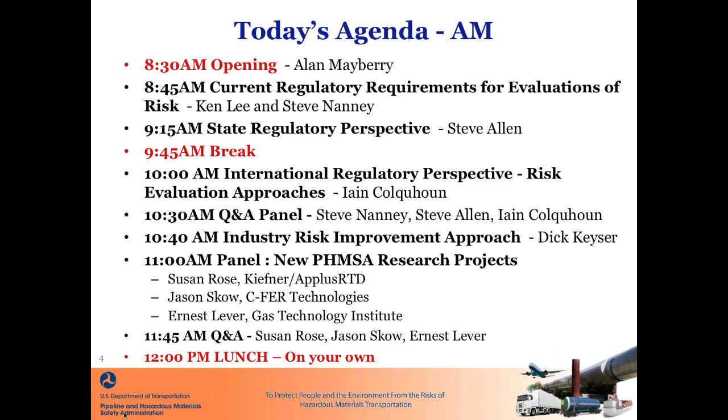Iain Colquhoun is joining us from the National Energy Board of Canada to provide a perspective from Canada. I understand Ian's probably just getting to DC right now, so we're cutting it close with him coming in on the agenda there. Hopefully he'll be here by 10. If not, we may need to scoot a couple of people around.

Then we'll have our first panel that talks about some research projects that PHMSA has undertaken, some recently awarded research projects, that will give you a summary of what's going on and what we're doing related to risk management in our R&D program, and some funding that we've done related to that.

Then shortly after lunch, we're lucky enough to have snagged the Honorable Chris Hart, the chairman of the National Transportation Safety Board, who will come and provide remarks after lunch. And then we'll get into some perspectives outside the pipeline industry after lunch, and then some other panels related to risk modeling later in the afternoon as well.

And that'll wrap up day one at about 4:15, 4:30 or so. I'll come back on to just wrap up, and we'll tee up the next day, which will kick off again at 8:30. We'll have another panel with 3 speakers, and we'll also have a perspective from Sara Gosman from University of Arkansas School of Law. She's also representing the Pipeline Safety Trust in providing that public perspective, and she happens to be working on a paper she'll be discussing related to risk management tomorrow.

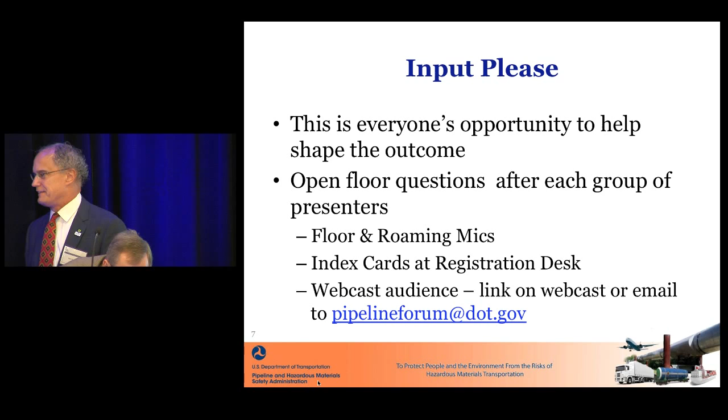Good morning, everyone. I want to thank everyone for attending here and also all the many people on the webcast. My name is Ken Lee, I'm Director of Engineering and Research at PHMSA. As Alan said, this event really follows up an event that we had in July of 2011.

That event, PHMSA and NAPSR held a public workshop on improving pipeline risk assessments and record keeping. That event focused on gaps in data and poor quality data, and that lack of data does not mean there are no risks. It focused on understanding interactive threats and the need to address this significant challenge. It also talked about how threats are not static, they're dynamic and changing with time, so you constantly need to change and adapt your models to take that into account.

Recent pipeline incidents and the National Transportation Safety Board really highlighted the need for continued diligence and improvements in risk analysis.

Our previous workshop highlighted the opportunities we had to improve the overall approach to risk analysis. PHMSA has been quite active in pipeline safety management systems, which risk analysis is a part of. This workshop will focus on risk modeling, mainly that subset of risk analysis, which is also a subset of risk management. So we're just going to focus mainly on the models today and tomorrow.

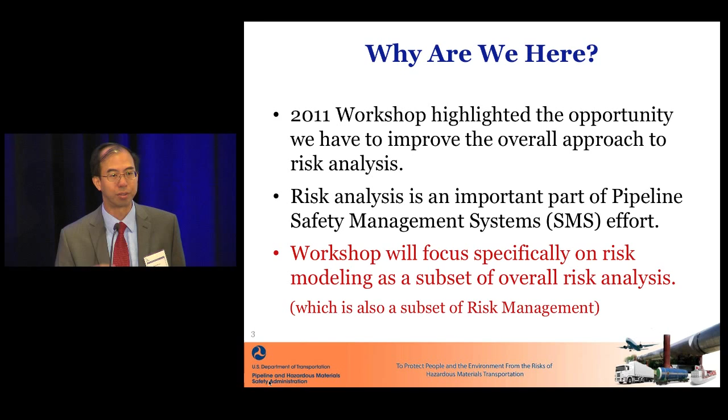This highlights the different issues that we need to address here. And like I said, Steve Nanney will continue the rest of the presentation, starting off with the National Transportation Safety Board recommendations.

Good morning. Let me ask one thing before we get started - how many people are more awake in this room than I am right now? I normally get up at 7 a.m. every morning, and that's Houston time. So I'm just now having breakfast if I was in Houston. So anyway, if I miss a beat or two going through this, just say, well, he's sleepwalking through the presentation.

One thing before we go - I always like to start with the last slide first, though I'm not going to have it up. What are the workshop goals? Why are we here today? Well, for me, it's to learn what risk models are. I'm probably the dumbest one in the room, or definitely not the smartest on risk models. So I'm here to learn. I'm here to listen to folks outside the pipeline industry, what they're doing

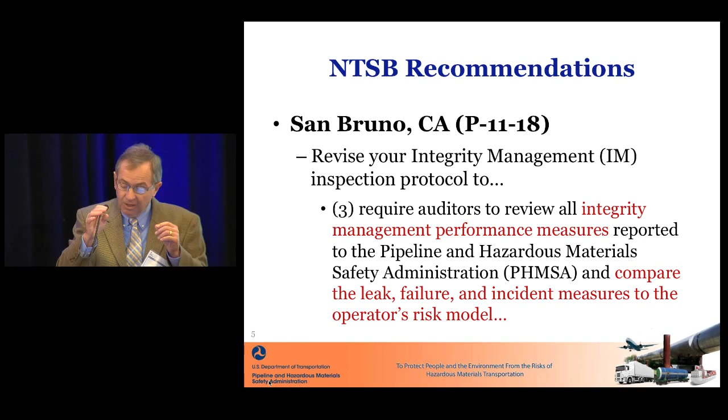Some of the things that the industry and PHMSA has gotten from the NTSB based upon San Bruno is, as you can see here on this slide, is to improve our integrity management performance measures. In other words, to compare the leak, failure, and incident measures to your operator's risk model.

How are you putting that in your risk model? That's one thing we've gotten from NTSB, from San Bruno, and others. When you see P-1509, the 15 stands for 2015. So this is a new recommendation that PHMSA and the industry have gotten from NTSB.

If you go on the internet and Google NTSB P-15-9, it should pop up. Anyway, it's to establish minimum criteria for eliminating threats and provide guidance to gas transmission pipeline operators for documenting their rationale for all eliminated threats.

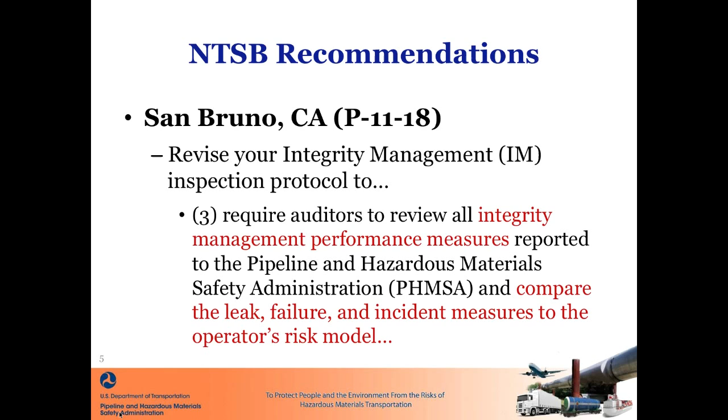Sometimes on a pipeline system, if it's an older system, it's hard to eliminate all the threats. We've got to realize that eliminating them is ongoing. It may be eliminated today, but due to how you're operating the pipeline, 2 years, 5 years, 10 years from now, it may pop up again as a threat.

Another NTSB recommendation is P-1510: update the guidance for the pipeline industry for the evaluation of interactive threats. The guidance should list all threat interactions that must be evaluated and acceptable methods to be used for those.

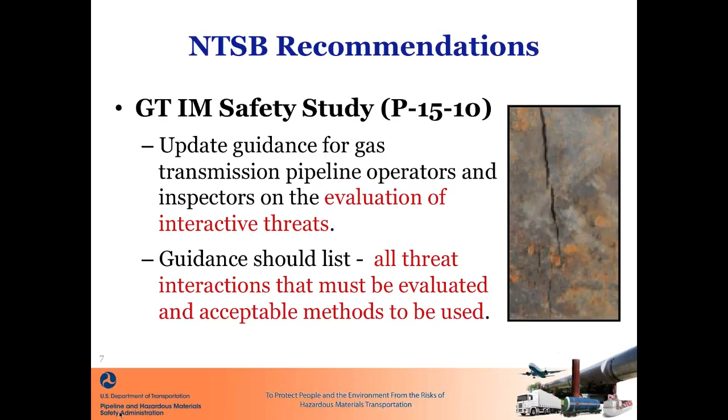An example would be if you've got disbonded coating, corrosion, and you're seeing cracking on your pipeline, what do you do for these type interactive threats? How often do you look for them? Are you doing a one and done on your pipeline, or do you have a robust methodology to go back and relook at it?

The next item is P-1511: develop and implement specific risk assessment training for inspectors. This is PHMSA - you need to better train your inspectors to look for risk and how it's treated by operators.

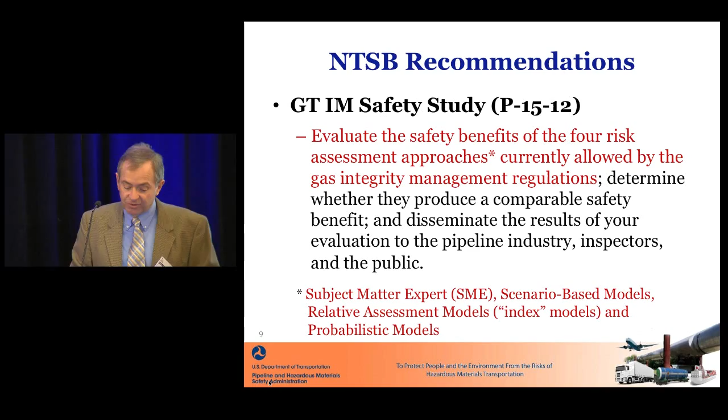The next one is P-15-12: evaluate the safety benefits of the four risk assessment approaches. At the bottom of the slide you'll see the approaches are the subject matter expert, or SME, the scenario-based models, the relative assessment models - I always call them the index models - and the probabilistic models, which I don't quite understand fully, and I know most of us probably don't have enough information to adequately implement them. I think that's one of the goals here today - we want to learn more about those types of models.

And then last is, how do we use these results? How do we evaluate them for safety, to keep our pipeline system safe?

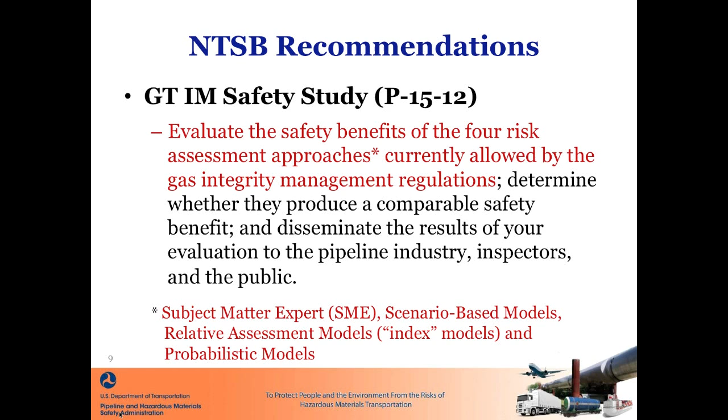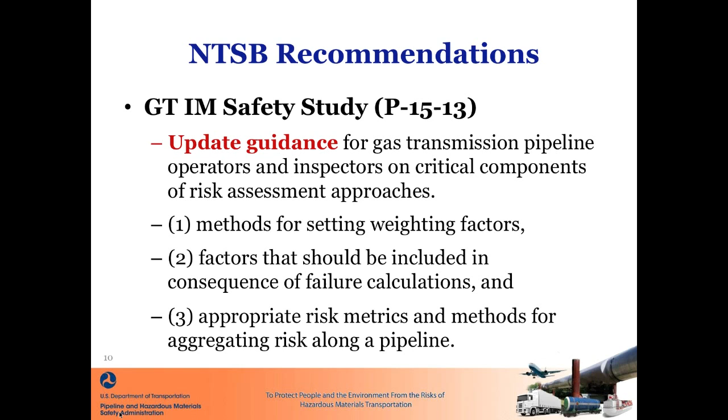From that, what does the code presently say? If it's gas transmission integrity management, it'll be under Part 192, Subpart O. If it's gas distribution, it'll be Subpart P under Part 192. And if it's hazardous liquids pipeline, the IMP program is in 195-452.

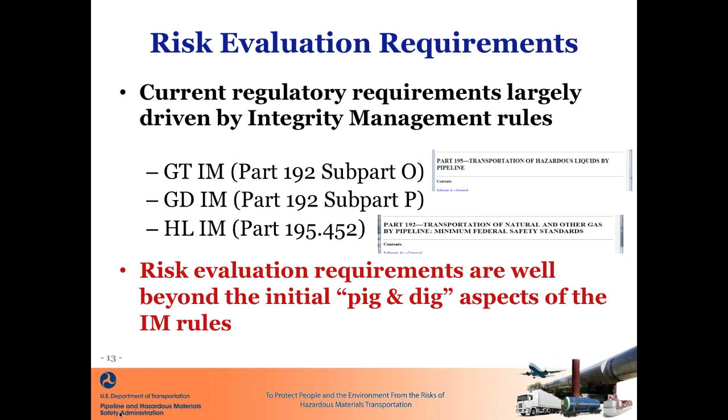All of these programs have metrics in there and requirements for doing risk modeling and risk evaluations. From a PHMSA standpoint, the industry is well beyond the pig-and-dig aspects of the IMP rules. What we're trying to do here today is get better models in place, and get guidance out for everyone to do a better job.

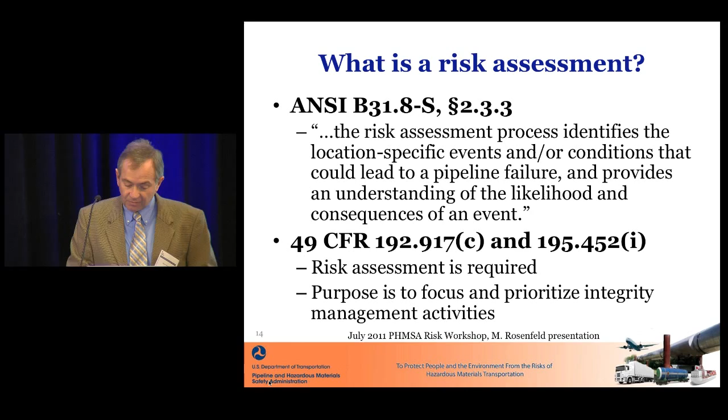Integrity management - what does PHMSA see as being a part of it? Of course, threat identification. One of the things that highlights San Bruno, which we seem to talk about at every seminar or workshop, is that the pipe was categorized as being seamless, 30-inch seamless pipe. We've got to make sure whatever we do, we characterize it right. We identify the threat correctly. If we say we've got seamless pipe when we've got low frequency ERW or some type of submerged arc welded, or whatever type of welded pipe we've got, we may be missing the boat. And that gets down to data gathering and integration of that information.

We have been having workshops on the integrity verification process as far as getting data for your pipelines, doing a better job of that. And then the risk analysis - that's the pinpoint here today - is when should we have assessment intervals? Should they be 2 years, 5 years, 7 years, 10 years? And how do we come up with the assessment intervals? Are we doing fatigue models? Are we not doing fatigue models?

Are we looking at the pressure profile of the pipeline, or the operational pressure profile? What preventative and mitigative measures are we putting into place? What are those measures? Are they appropriate for the type of risk that we have on the pipeline? And then, are we monitoring the defects or the anomalies in the pipeline? And again, that decision-making has to be an ongoing process.

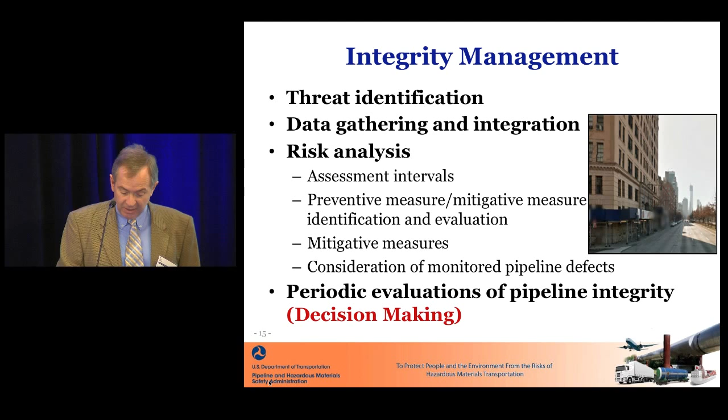The risk evaluation requirements for a successful integrity management program - it should be investigative, data-driven, analytical. Definitely look at interacting threats. We think in most models that's a weakness that operators have, is how they look at interacting threats. I know for some of them, it's very hard when you've got one, two, three, maybe even four things acting together to cause the problem. What is your integrity decision-making? And then what are you doing for the prevention and mitigation of those?

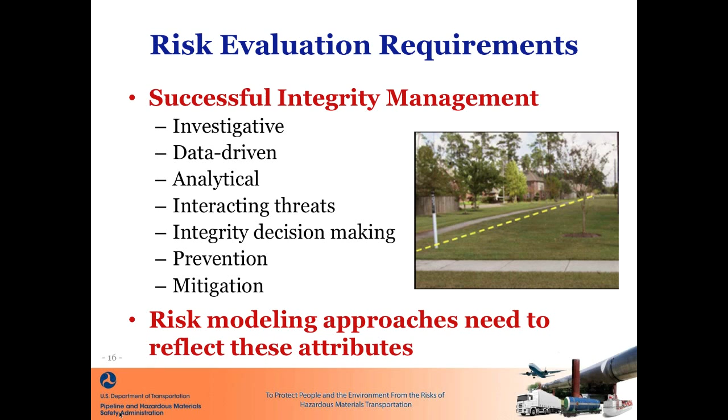The risk evaluation requirements - the risk evaluation approaches need to be investigative-oriented. For me, what that means is you've got to get out on the pipeline. In a lot of cases, you've got to dig it up to see what's wrong, or you've got to run a pig through and properly evaluate those results. You've got to make sure that your ILI vendor is giving you all of those results, that you're properly giving them requirements, that you get them, that some of them are not hidden. Not that you would know they were hidden, but make sure you skin the onion to make sure you're getting all of those.

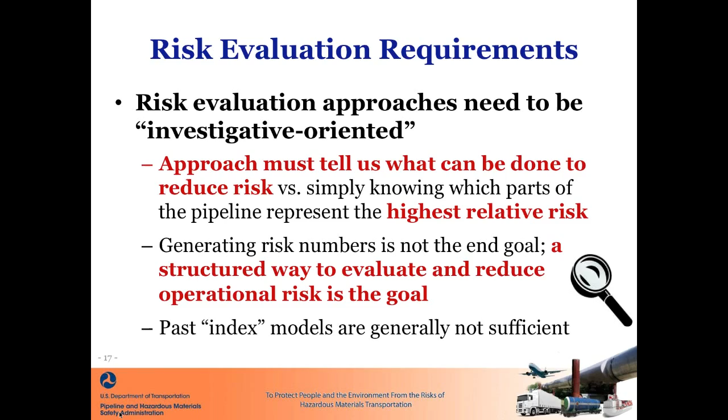In other words, the approach must tell us what can be done to reduce risk, versus what is the highest relative risk on our pipeline. And in generating the risk numbers, that's not the end goal, but we should have a structured way to evaluate and reduce the operational risk. That is the goal. From PHMSA's standpoint, past index models are not sufficient. We've got to look at what we do on these interactive threats. Do we use two separate models to look at threats? It may be that one model is not the end all.

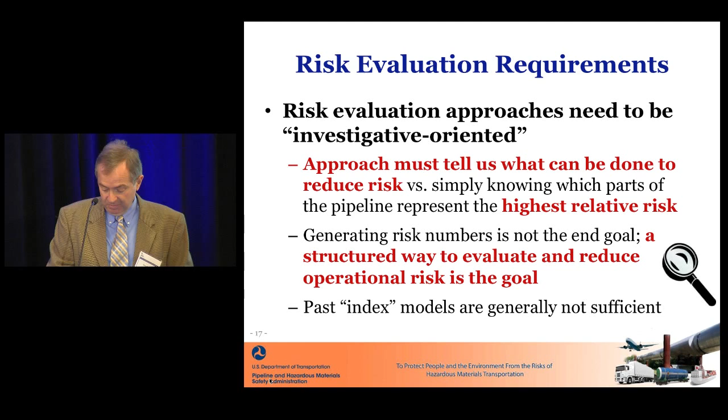As far as data, as you can see, the head of this slide is data, data, data. If you don't have the data, it's hard to do the risk model. Again, missing and inaccurate data results in an unreliable risk evaluation conclusion. In other words, garbage in, garbage out if you don't have good information. That's why PHMSA is pushing the integrity verification process for both gas and liquid pipelines, because we see that there are still gaps in the basic data.

A question about missing data: think back, you've been doing integrity management for 10 or 12 years, depending on gas or liquid. On pipelines where you have data gaps, have you been doing destructive testing on the pipe, on the seam, the pipe body, looking at the coating where you lack information, so you gather that data? Are you checking for cracking in the pipe? Are you doing all these things, not just running pigs, but when you dig up the pipeline, are you looking at everything? And then keeping the data up to date, I know that's a big challenge.

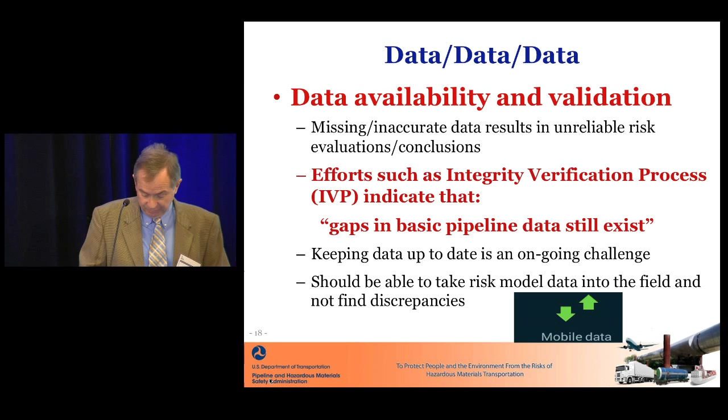Also on data and risk assessment, poor quality data is a key item PHMSA sees behind bad risk assessments. No risk model can compensate for bad data, whether it's wrong data, missing data, or inappropriate defaults where you don't have data. Again, ASME B31.8S, which we all point to as the guide, whether code or operators, says inaccurate data will produce a less accurate risk result, which to me is just common sense.

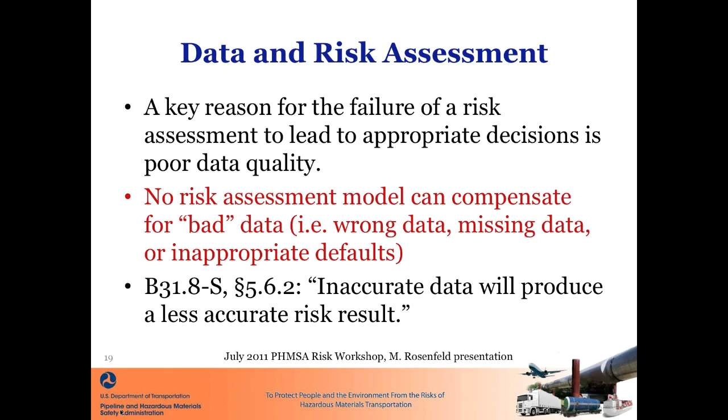Threat identification: evaluate existing and potential threats, justify the elimination of threats from consideration, whether time-dependent or time-independent threats, they all need to be looked at. Another thing a lot of operators are doing more of is making sure you keep up with near misses. They become part of the process in your maintenance records. Make sure you're getting those and incorporating them, that you've got a good data integration process that's ongoing. And again, known threats identified in industry literature, learn from others.

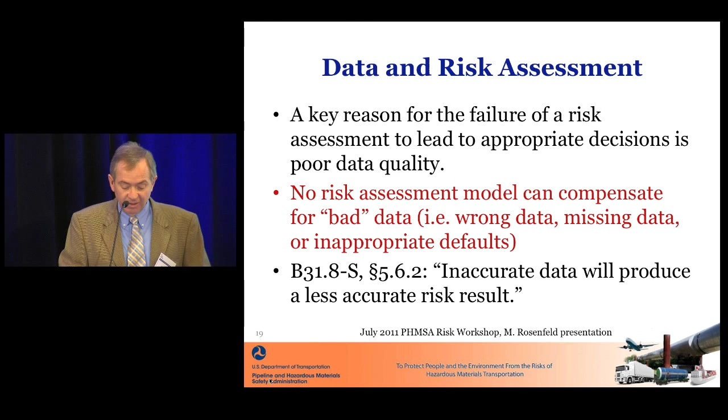Threat identification also means understanding how these threats interact with each other. Consider that interactive threats can be a potential threat. Here's some examples, like earth movement: could it create problems in your pipeline, whether it's wrinkle bends or vintage-type girth welds that may never have been x-rayed and may be cracked? When you start getting movement, those cracks open up, whether you've got external corrosion or third-party damage. And then the last is disbonded coating, shielding coating, and corrosion and possible SCC.

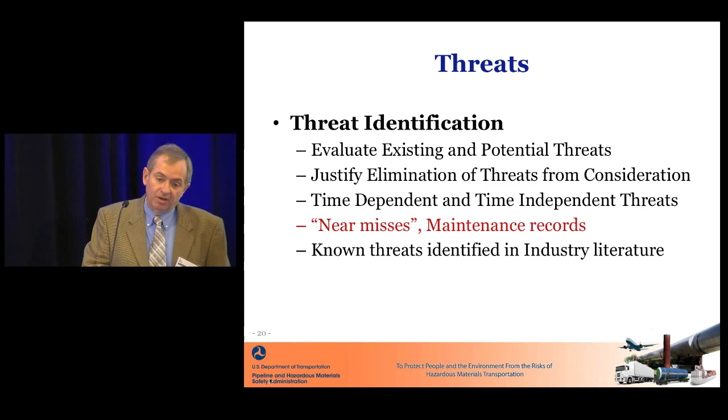Do you have that? Again, go back and look at some of the PHMSA advisory bulletins, whether on SCC or low-frequency ERW. Most of the time when we see something happening throughout the industry, we do put out advisory bulletins on it.

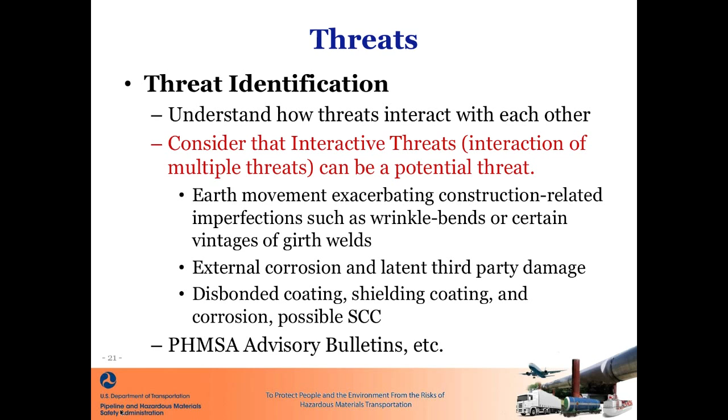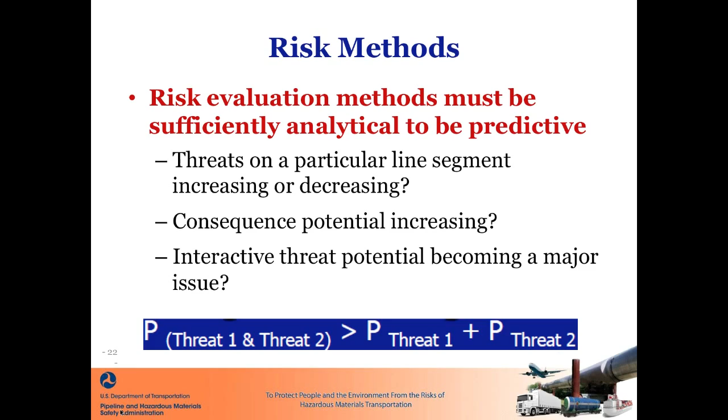Risk methods. If you look at the bottom of the slide, I have no idea what P greater than P1 plus P2 is, but I think we're going to learn this week as we go through what that means in real terms. Anyway, risk evaluation methods must be analytical to be predictive. In other words, the threats on a pipeline segment may be increasing or decreasing. You need to look at the consequence, what's around the pipeline in this area, and consider it. And then the interactive threat potential of becoming a major issue—that equation where threat 1 and threat 2 combined become a bigger threat than by themselves.

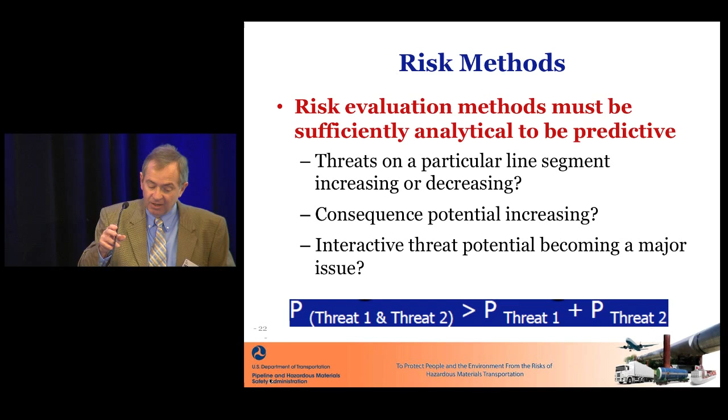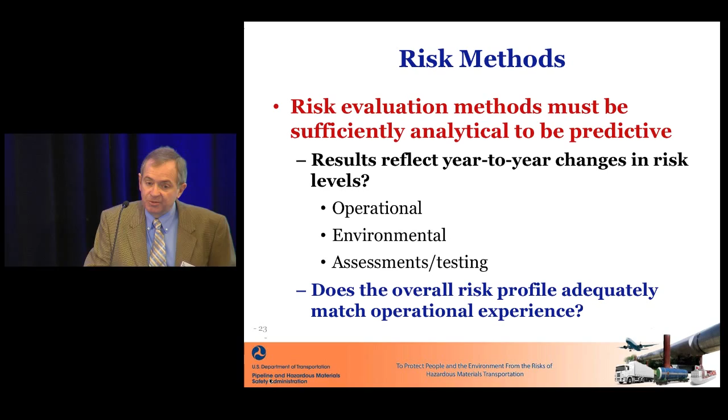As far as risk methods, the risk evaluation methods must be predictive. The results need to reflect year-to-year changes in risk levels. You've got to consider operational information, environmental factors, and the assessments and testing you're conducting on your pipeline. Does the overall risk profile match your operational experience? A lot of times PHMSA sees that that's not being adequately implemented in risk models.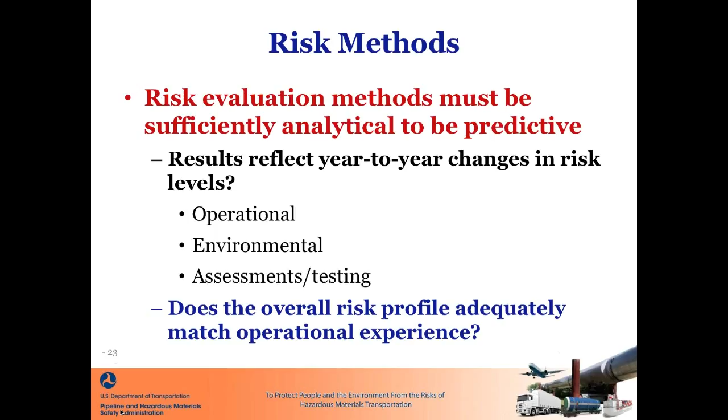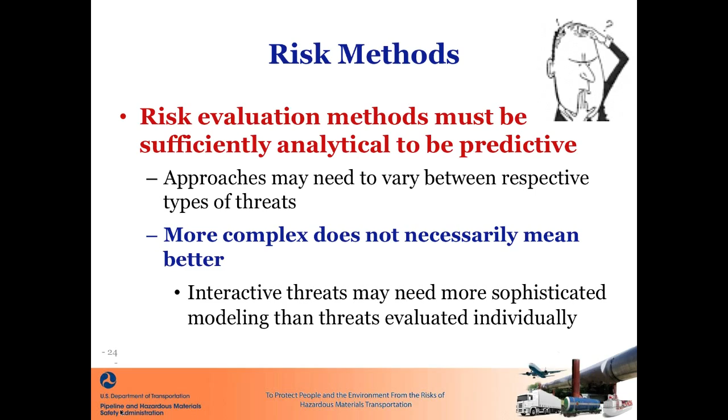Again, risk evaluation methods must be sufficiently analytical to be predictive. The approaches should vary between respective types of threats. We've got to have different approaches based upon the type of threats.

Connection to decision making. Risk evaluation results must have a connection to real-life decision making. The point of risk evaluations is not just to do the risk evaluation, in other words, not to check the box. Risk insights must be integrated into routine, integrity-related decision making, and operators should be able to easily demonstrate how risk evaluation results influence operational work practices. That's the key one—a lot of times we're doing the risk model and we're not implementing the results of it.

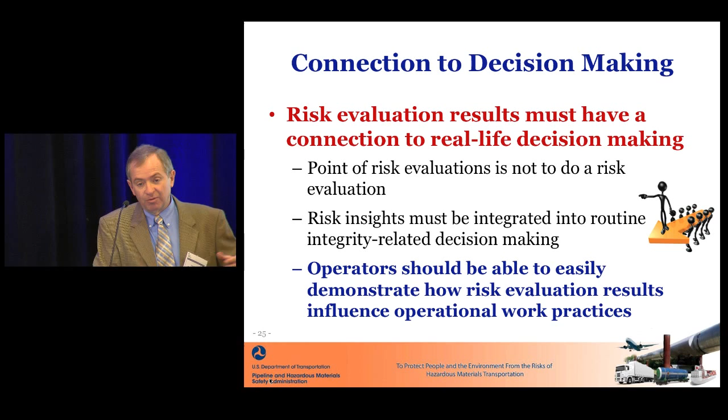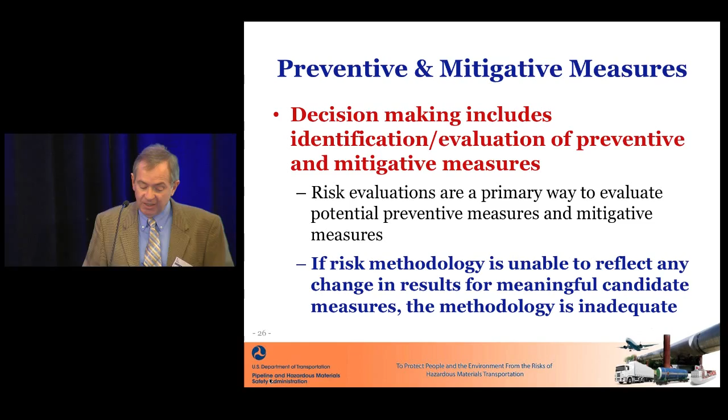Or we're implementing it on just a small segment of the pipeline system. Again, the P&M measures, the preventative and mitigative measures, the decision making should include the identification and evaluation of these methods, and of course the implementation of them. If the risk methodology is unable to reflect any change in results of the meaningful candidate measures, the methodology is inadequate.

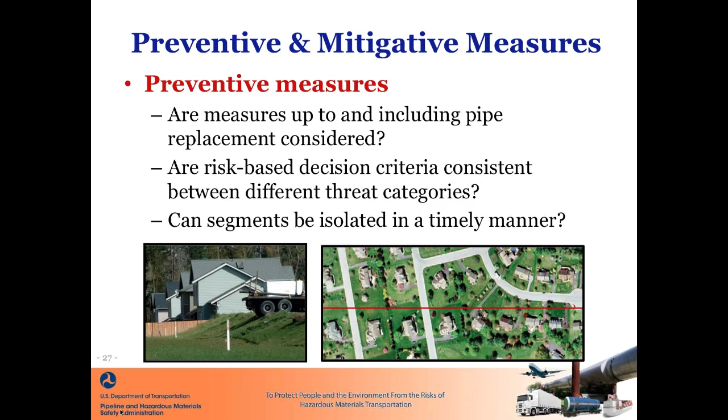And then the P&M measures, are you considering pipe replacement? If we've got seam issues or cracking issues on a pipeline that we just keep having, should we be considering replacing the pipe? That's not an unheard of thing. I did it 30 years ago, working for an operator, replaced pipe with Youngstown steel that had low frequency ERW, hundreds of miles of it. Sometimes when we have pipe and we keep having the issues, we need to replace it.

Are the risk-based decision criteria consistent between different threat categories? And then if you do have a segment that you have issues, can you isolate it if you do have an issue? Can you do that timely? I would look at that as a P&M measure to make sure I have in place.

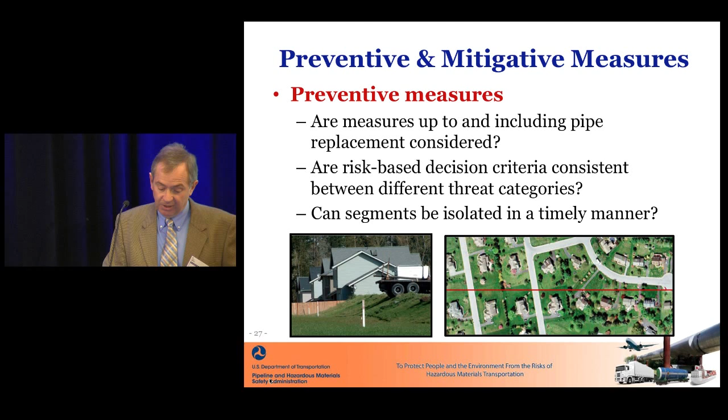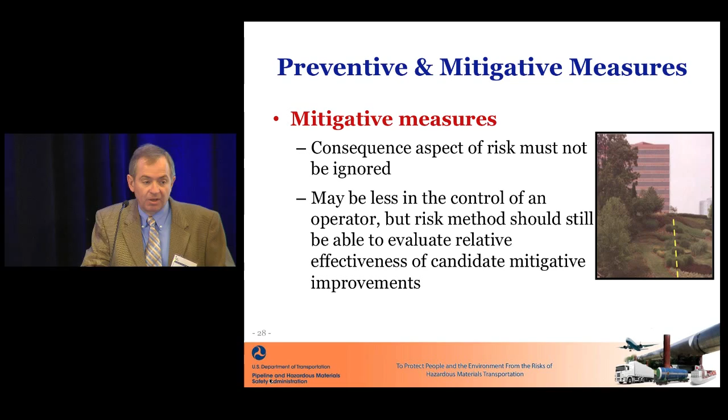Again, the mitigative measures, the consequence of the risk must not be ignored. If you're in a Class 3, Class 4 location or in an HCA, what are your mitigative measures? The pipeline risk is not limited to the right-of-way. What are we doing in our facilities? Whether it's a compressor station, pump station, or tank farm, what are we doing there?

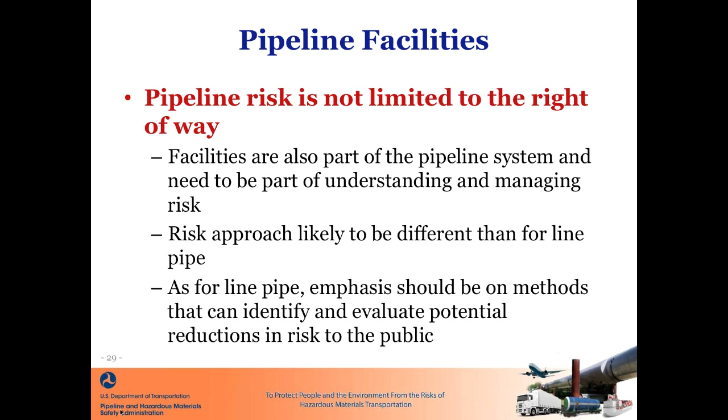Some recent inspection issues that PHMSA has seen, I just want to touch base, and let me say, I personally didn't see these. This is what's been given to me. This is just an overview of what PHMSA has seen on inspections from different regions. It's not trying to pinpoint one region versus another or anything.

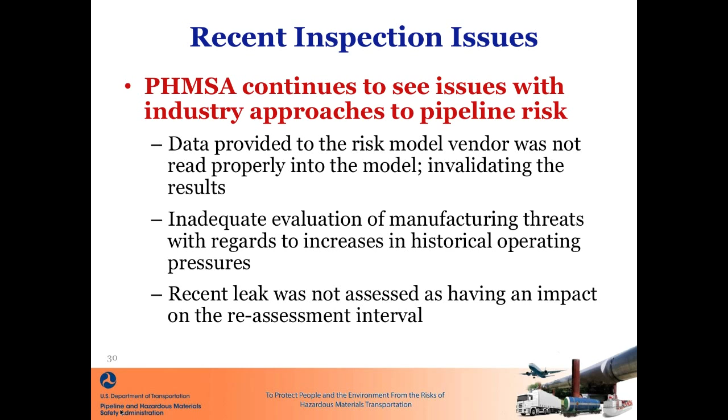Some of these issues are data provided to the risk model vendor was not read properly into the model, invalidating the results. In other words, you may have had good results or good information, but it wasn't properly put in the model.

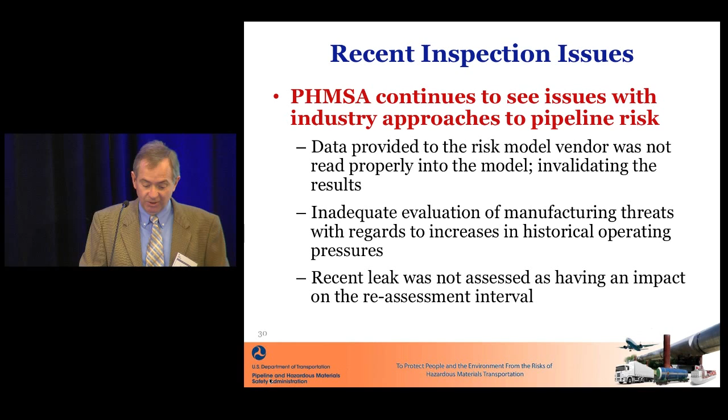Inadequate evaluation of manufacturing threats with regards to increases in historical operating pressures. And then the last is there was a leak on the pipeline, and it was not assessed as having an impact on the reassessment interval for the pipeline, which I guess is sort of surprising, that you could have a leak on a pipeline and not think that you should evaluate your reassessment interval.

Going on down, some others is unable to demonstrate evaluation of facility risk and what has been completed for each station. Using subject matter experts for risk analysis, but there were no qualifications documented for the SME. Missing risk factors evaluated, such as low-frequency ERW seams, disbonded or shielding coatings, and shorted casings.

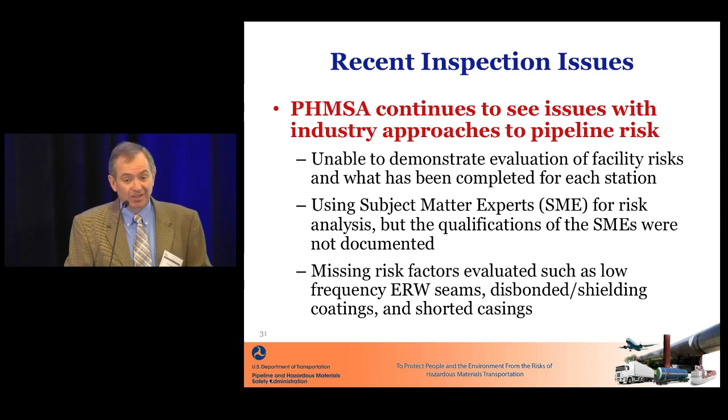In other words, they weren't put in the model as a risk. That model missed it totally in my book if it didn't have things like that in there. That's what risk modeling is all about.

What can be done to improve the overall performance of pipeline risk models? That's a major goal of the next 2 days, is for all of us to listen to what the experts that we've invited here today from other industries, to take notes from what they're doing, and hopefully from that we can better define our risk models.

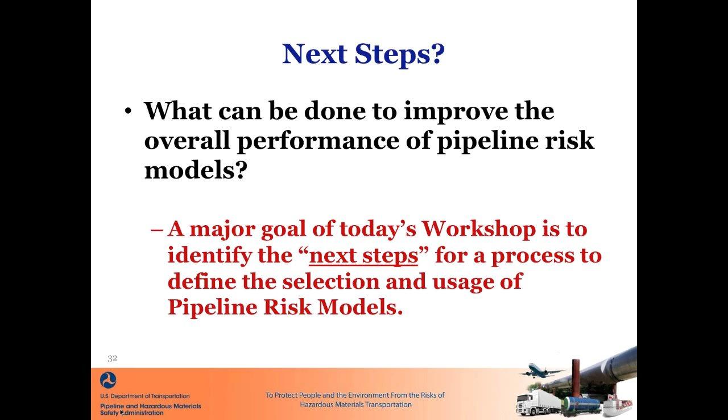What PHMSA plans to do, and you'll hear Alan, Ken, and myself talking about it throughout the meeting, is looking to see PHMSA working with you as an industry, working with the public, to see what kind of guidance documents we can put in place to better define, to get everybody at the same point in what we put into risk models and how we evaluate them.

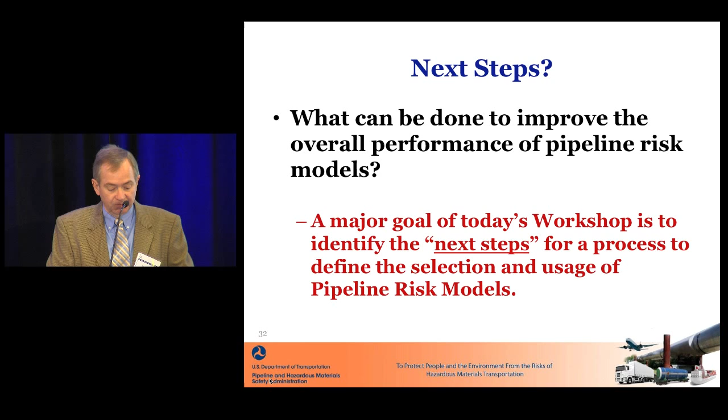Again, as I said earlier, if you don't remember anything that I said through the past 20 or 30 minutes, just remember this as you go through this meeting. We want you to learn, we want to have creative thinking, and we want to come up with potential next steps of what we do.

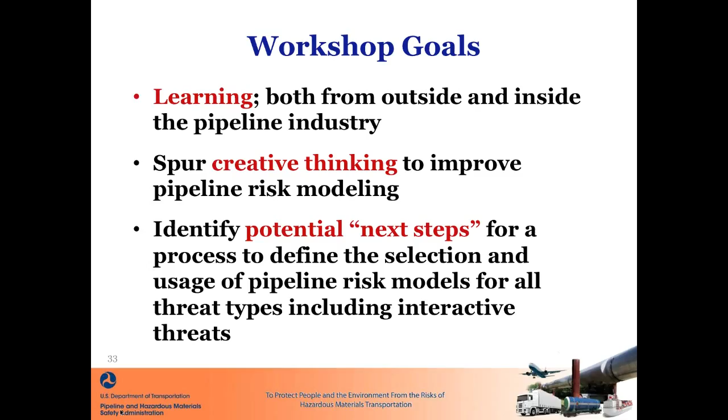And from a PHMSA perspective, that would be putting together a group to come up with how we look at threats, whether they're interactive or whether it's a single threat. How do we evaluate them? How do we do reassessments?

And thank you for listening. I didn't see anyone asleep, so thanks.